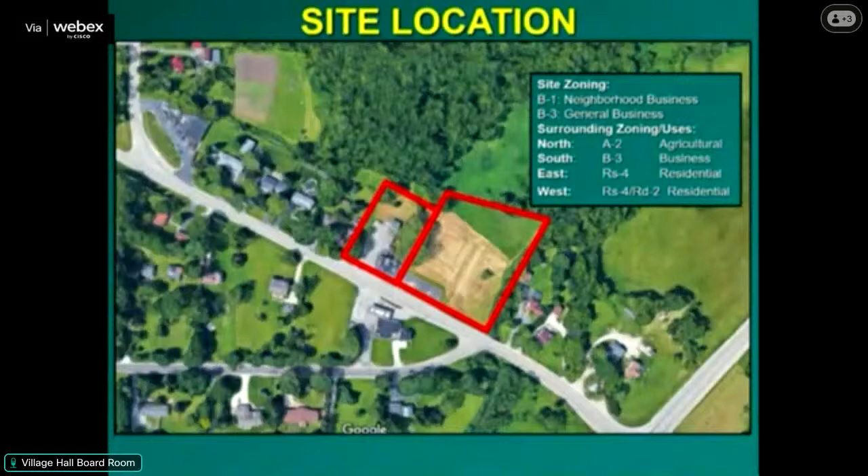Doctors LLC owns two parcels on screen, to the left, to the west. A 0.9 acre parcel zoned B1 neighborhood business contains an existing restaurant, bar, and parking area. A 2.1 acre parcel lies to the east, to the right on the screen. It's vacant, except for a small paved parking area adjacent to Appleton Avenue, and is zoned B3 general business. Back in 2019, Mr. Brooks obtained a conditional use permit from the village that allows him to use the adjoining paved parking area on the 2.1 acre parcel as part of his business operation.

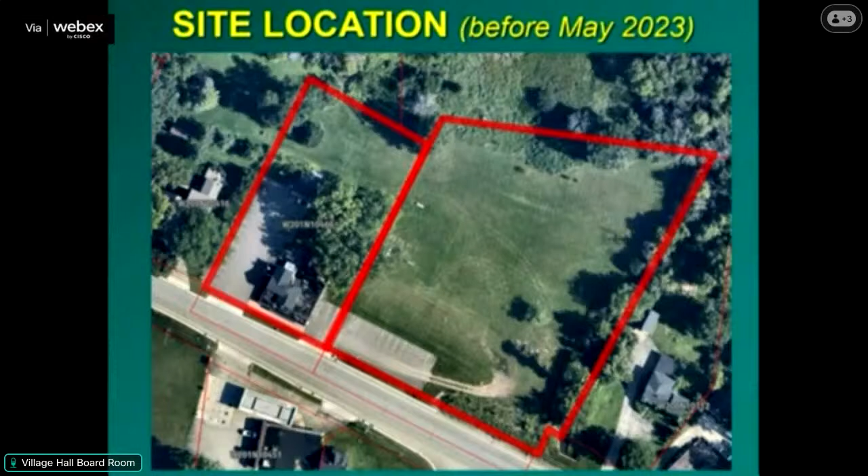Condition 1 effectively allows that use. Condition 3 in that conditional use permit requires any expansion of the parking lot to obtain an amendment to the conditional use permit and site plan approval from the Plan Commission. The image on the screen is of the sites prior to May of 2023. We know that sometime in May of 2023, the operator brought some gravel onto the site without obtaining the proper permits and approval under the conditional use permit.

So a code violation notice was issued, and the operator and the owner were given a couple of options: to remove the gravel, restore the site, and prohibit parking beyond the 4,800 square feet of paved parking permitted under the conditional use permit, or apply for a conditional use permit amendment with the intention of trying to get the board to approve an expansion of the off-site parking area under that conditional use permit.

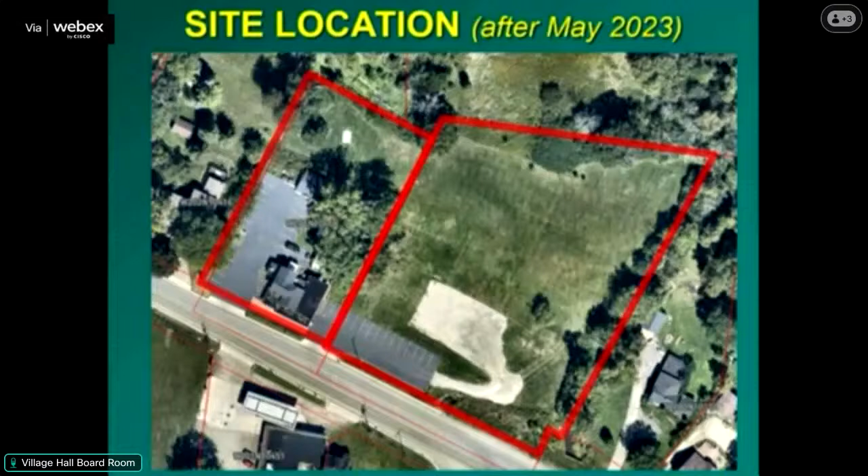In October of 2023, Plan Commission first reviewed a conditional use permit amendment request by Mr. Brooks. His request was to allow the continued use of the 4,800 square foot off-site paved parking area, which is highlighted in black on the screen.

The request also sought to allow expansion of that off-site parking area by allowing the gravel already brought in to remain, estimated to be just over 7,000 square feet, highlighted in red, and to allow an additional gravel parking area of approximately 2,500 square feet, shown in blue.

At the time, the Plan Commission discussed this proposal with Mr. Brooks and tabled action pending the submittal of code compliant and engineered site plans for whatever parking area was proposed for the off-site CUP amendment.

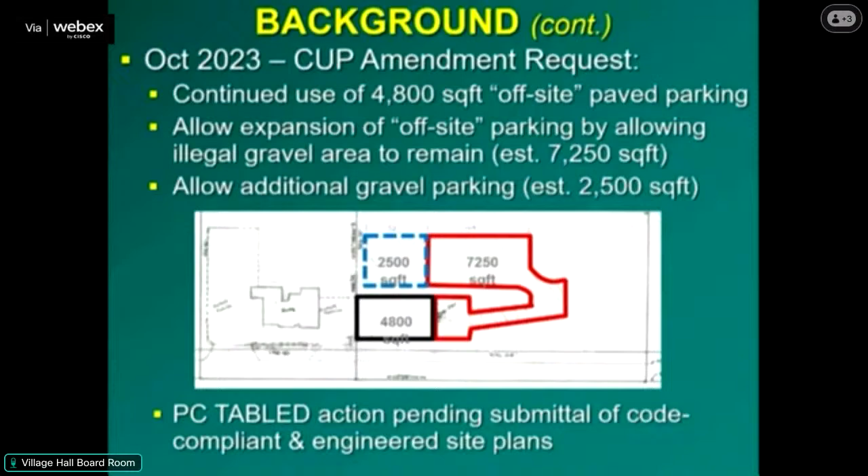In March of this year, in consideration of that CUP amendment, Mr. Brooks submitted engineered plans. He hired an engineer and a surveyor to prepare a site survey, existing conditions plans, and engineered site plans for the site, including 2 parking lot options.

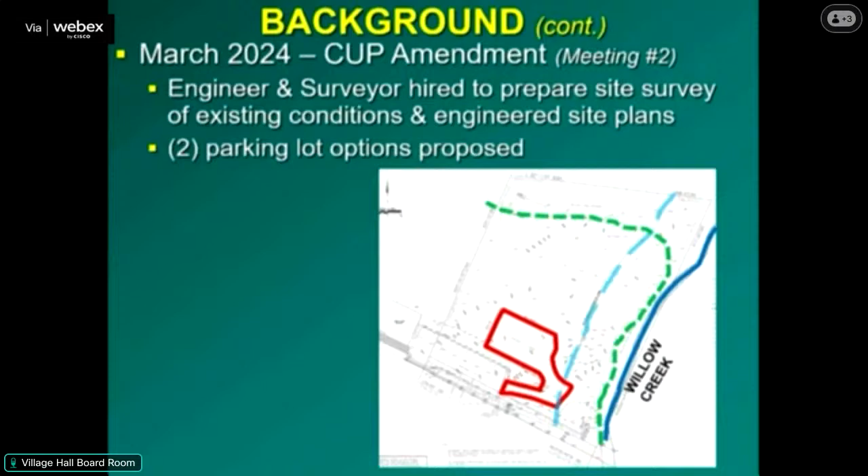Option 1 was to reduce the size of the gravel that had been deposited on the site, relocate it outside of a 75-foot navigable stream setback from Willow Creek and outside the 25-foot setback from the wetland area associated with Willow Creek, and reduce it to a size just under 5,000 square feet that would provide an additional 12 to 14 parking stalls, as highlighted in red on the screen.

Option 2 was to reconstruct the existing 4,800 square feet, which was a requirement of the CUP if the area was to be expanded, and redesign the parking area to meet zoning code setbacks and stormwater management requirements.

In the course of reviewing those alternatives, it was decided to keep whatever parking area was proposed under 5,000 square feet so as to not exceed stormwater management requirements that might trigger the need for either green infrastructure improvements on the site or more significant stormwater facilities on the property.

Option 2 was a code compliant paved parking area that unfortunately only provided 14 total stalls, no net increase from what had been previously provided by the original 4,800 square feet of pavement.

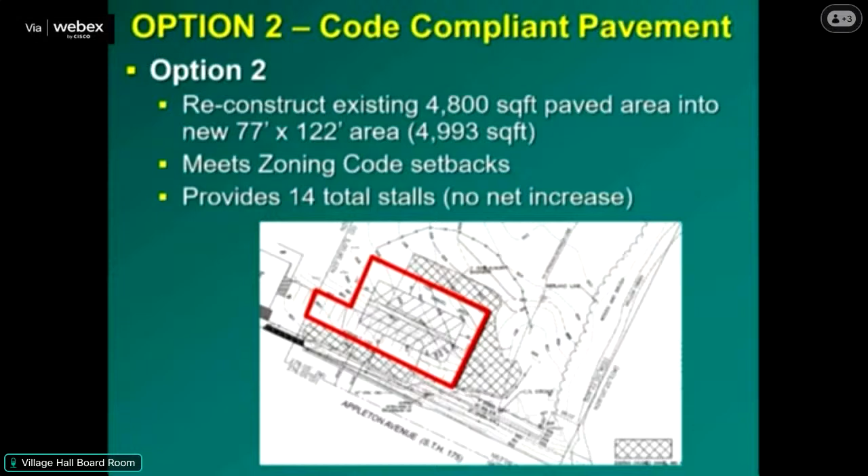So at the March meeting, the Plan Commission recommended an alternative, a combination, to approve the CUP amendment allowing off-site parking expansion, and to approve option 1 with 3 conditions: that the gravel area actually be paved to be compliant with the zoning code, and that a 10-foot wide buffer designed to filter stormwater runoff from both the existing and new parking areas be installed around the perimeter and along the connecting driveway between the 2 parking areas.

Also required was a barrier around the perimeter of the parking areas to prohibit parking beyond the 2 paved parking areas approved under the CUP. The village board approved the Plan Commission recommendation and amended the CUP soon thereafter.

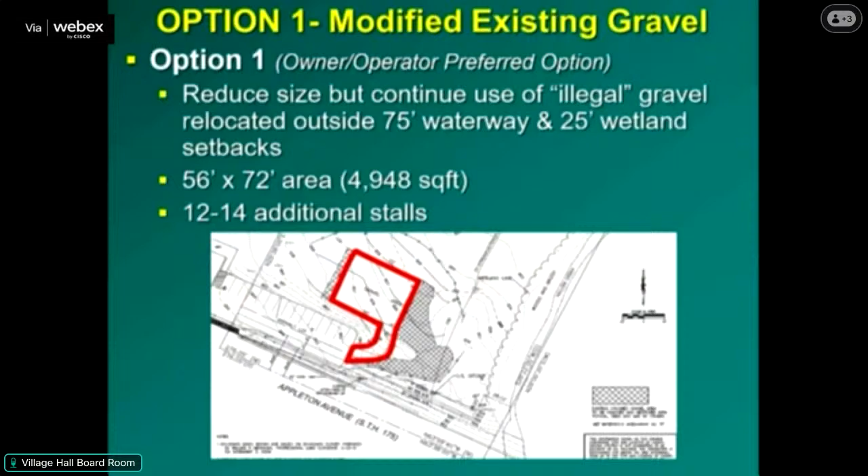The vegetated buffer is shown around the perimeter, and the barrier proposed is a post and rope barrier fence installed around the perimeter of the new parking area: 4x4 posts, 3 feet out of the ground, with a 1-inch diameter rope linking the posts. The proposal is for the posts to be spaced at 10 feet.

As you'll see in the staff recommendation, the recommendation is to reduce that spacing to 6 feet. But with that, the staff recommendation is to approve the site plan for the revised option one, subject to 4 conditions that we can go over as necessary.

Mark Brooks is here with his engineer and surveyor. If you have specific questions you want to ask—Mark, is there anything you want to add at this point? No. So with that, again, the staff recommendation is to approve the site plan with 4 conditions.

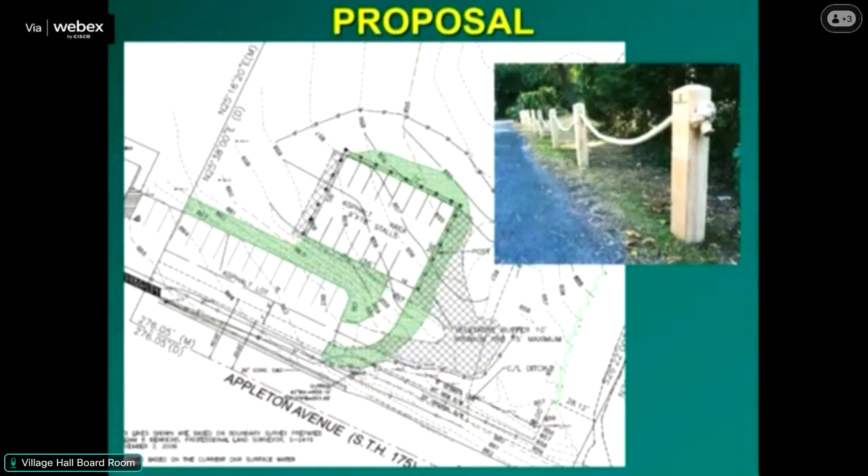All right, thank you. Commissioners, I will make a motion to approve as presented for discussion. Motion made. Do I have a second? Motion made and seconded. Discussion.

Trustee Baum: So at the last village board meeting, this project, the liquor license, is coming into question. Well, how are we handling all of this? Do we table this another week, another period, to get the village board stuff resolved? Or are we moving this forward, and can this move forward without interrupting the village board issues?

Well, they are 2 separate issues, albeit tied together with the Das Bellroom operation. I have not received a request from Mr. Brooks to table action, continue it, or even withdraw it in light of what the board is pursuing.

I guess it's up to the plan commission if they feel it's necessary to table this for some reason, but obviously if it's approved, it could be with an additional condition subject to the business remaining in operation and the parking being required, or some other wording you may see fit. So we need to address it if we want to.

What I've learned over the past few weeks is that while we've solved the problem of people parking out on the grass by putting this rope barrier around, we've just moved the problem somewhere else. People are now parking across the street and we don't have conditional use approval for that off-site parking, and they're parking in the grass over there now. So how are we going to resolve that?

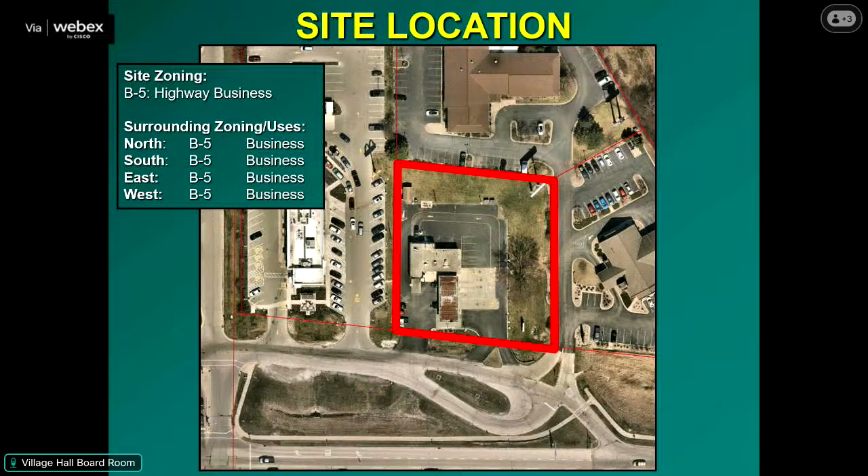Thank you, Mr. Chairman. The new Crew Car Wash will be located, as shown on the screen, on Emmer Drive, the short frontage road adjacent to County Line Road, just west of the US 41 interchange. Back in April of this year, site plan approval was granted for a new 4,500 square foot car wash facility. The site will be completely redeveloped and replace the existing BP gas convenience store and car wash operation on the 1 acre parcel.

At that time, action was tabled on the sign package, and that is presented here this evening for your consideration. Since that meeting, staff has worked with the Crew Car Wash representatives on signage. Some modifications have been made to some of the signs that were originally proposed, and staff believes the package that is presented now is code compliant and recommends approval for 21 total signs, including wall signage, the replacement of the pylon sign face, and mostly directional and instructional signage around the site.

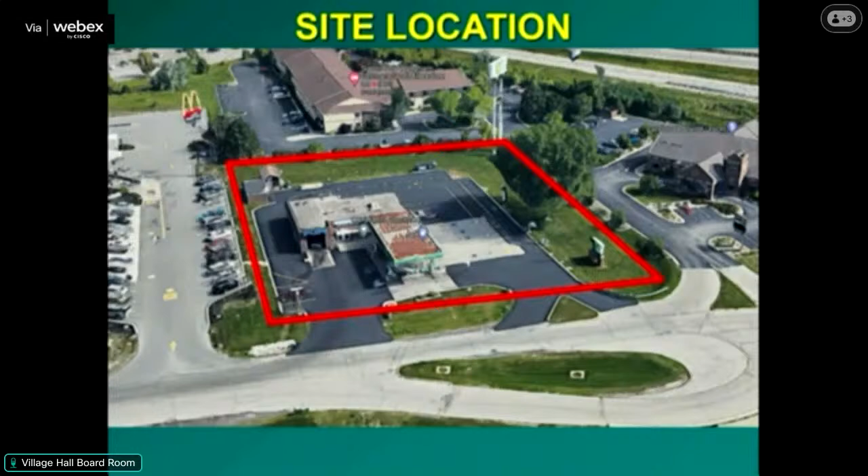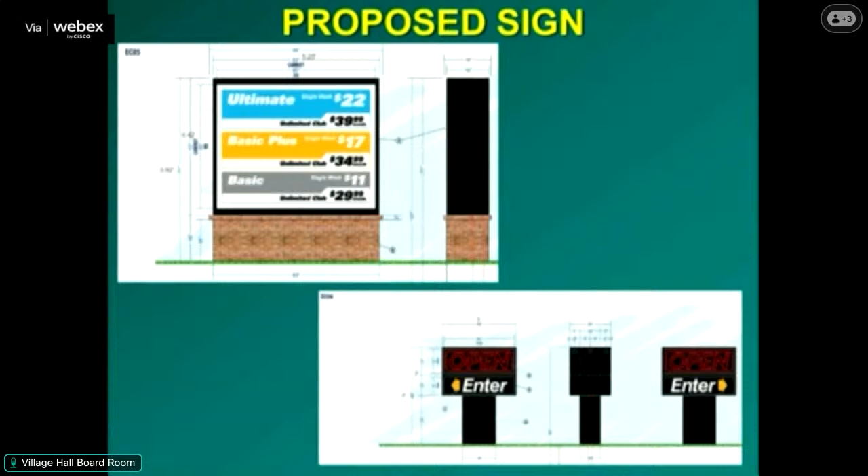I can quickly go through some of those signs. The monument sign will be refaced. The existing pylon sign will be refaced. Signage will be included on 2 of the elevations on the building itself. Additional instructional signage back into the site itself for those in the queue for the car wash, and additional directional signage, wall mounted and directional monument ground signs as well across the site.

The staff recommendation is to approve as proposed, subject to one condition that simply has to do with getting an electrical permit for any signage that requires electrical work.

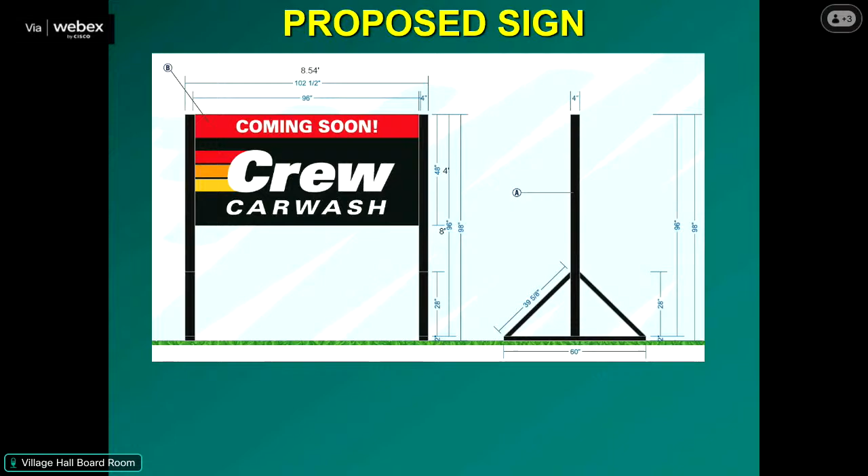Thank you. Okay, make a motion to approve the proposal as presented. Motion made and seconded. Any discussion on the motion to approve? No discussion. All those in favor, please say aye. Aye. Opposed? None opposed. Motion carries.

Next item under new business is item C, Innovative Signs, Inc., agent for TDC Willow Creek LLC, property owner located at North 102, West 19200, Willow Creek Way. That is on tonight's agenda for sign review for Diamond Vogel, for action.

Give us more information and background on this new business item. We'll turn the meeting over to the Associate Planner, Jordan Yankee. All right, thank you. So I don't have a sign package, just one wall sign for review. We'll go to the site here.

So the applicant on this is Diamond Vogel. Actually, it would be the tenant, the owner, I'll get to in a moment. But Innovative Signs is proposing a wall sign at the new industrial building located off of Willow Creek Way. I'll actually go back for a second. You'll see the address, and that building was approved about a year ago and was recently constructed.

As you'll see here, it was approved in 2023, a little bit over 200,000 square feet of industrial multi-tenant type building, part of the Willow Creek Business Park. As I mentioned, this application is Innovative Signs, agent for TDC Willow Creek, the property owner, requesting approval just for one wall sign for Diamond Vogel at the subject location.

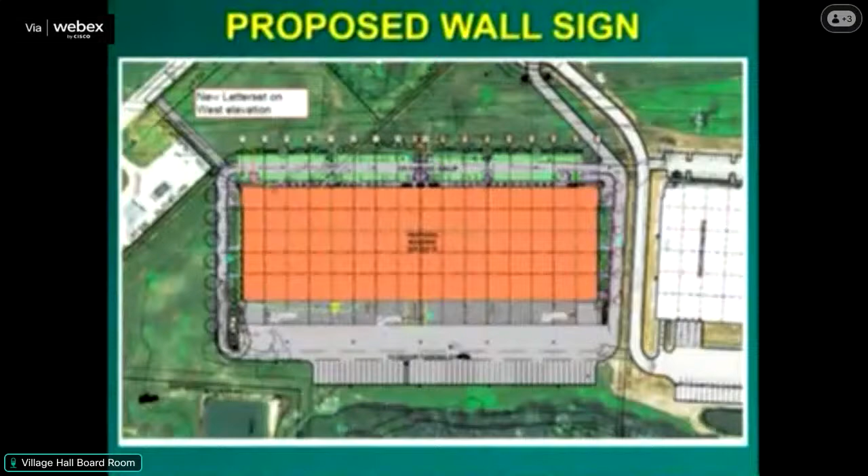And here is the layout of the new building. The location of the sign is a little hard to see with the colors, but in the image it's in the top left, which is actually the southwestern facing wall of the building. Again, it's roughly 81.5 square feet. It meets the square footage allotment in the code. It will be illuminated in accordance with the application from Innovative Signs, at the southwest corner of the building above the building entrance.

So with that, the recommendation of staff is to approve the wall sign for Diamond Vogel, subject to two conditions. One, as Jeff just mentioned, would be the same on this one, the requirement to obtain an electrical or building permit for review. And the other condition noted in the packet was to obtain written approval by the association for that industrial park. So with that, I can answer any questions. I do believe the applicant is in the crowd tonight as well.

I'll make a motion to approve the proposal with the two conditions. Motion made and seconded. Any discussion on the motion to approve? No discussion?

Did you have a question? Okay, do you want to come to the podium and state your name, and you are, sir? I believe the electrical permit for the sign was covered under the original developer's electrician's permit. Okay, thank you for that.

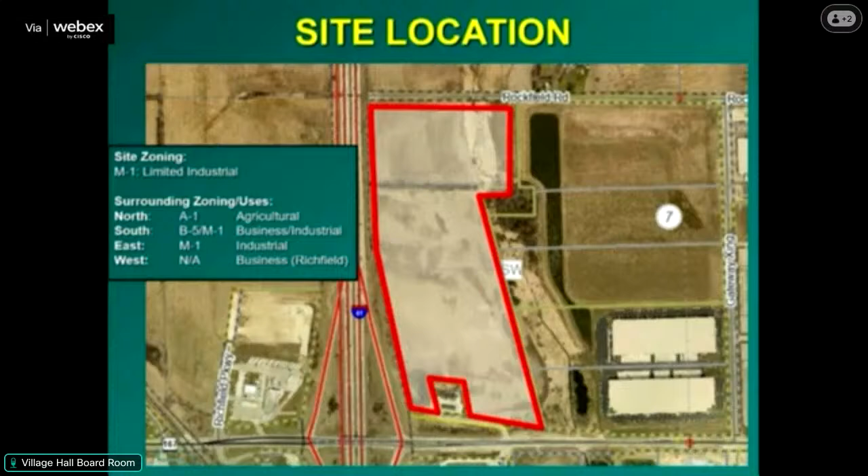And this site is located in the Holy Hill Gateway District. Here you can see the site location. It was rezoned to M1 Limited Industrial, and you'll see some of the surrounding area there. In short, the certified survey map would create one total parcel, depicted in the site location map, here showing the existing site with that gas station just to the south nestled in.

As I mentioned, this is in the Holy Hill Gateway District, which calls out industrial as desirable land use in our 2050 plan. Some brief background: the land use plan change and a rezone was approved for the site as recent as 2023. The land use plan was changed to light industrial warehousing, and the zoning was changed to M1 to support the new Green Bay Packaging facility.

Site development plan and the conditional use permit was approved earlier this year, actually just as recent as April, I believe. And in totality, it's roughly 270,000 square foot warehousing facility with a small office.

Just to reiterate, the result of the CSM will be a 1-lot, 51.895 acre lot to house that manufacturing facility. Here's the CSM, hard to see, but again that lot mimics what was on the previous slide.

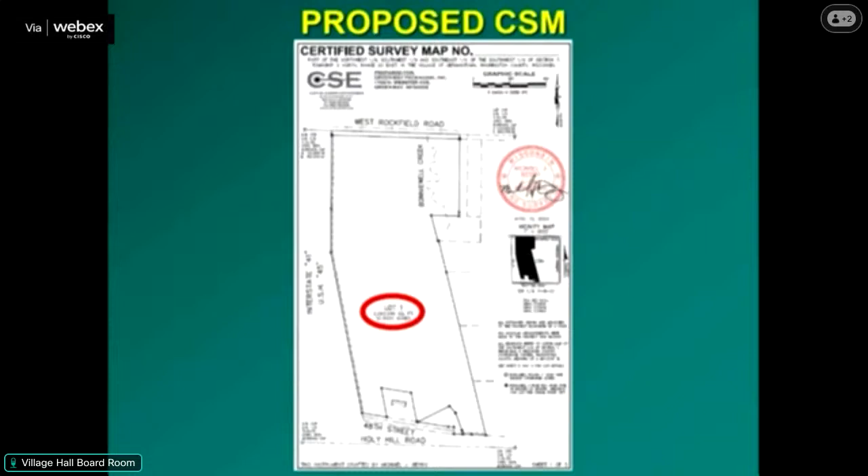One thing to note, there is a little bit of a jog in the lot line on the southern portion. I believe that was through dedication of public right-of-way with the Holy Hill reconstruction, so you'll see a little triangle portion of property that will actually be dedicated right-of-way, if I'm not mistaken. With that, here zoomed in a little bit, you can see the new road entrance design for the facility.

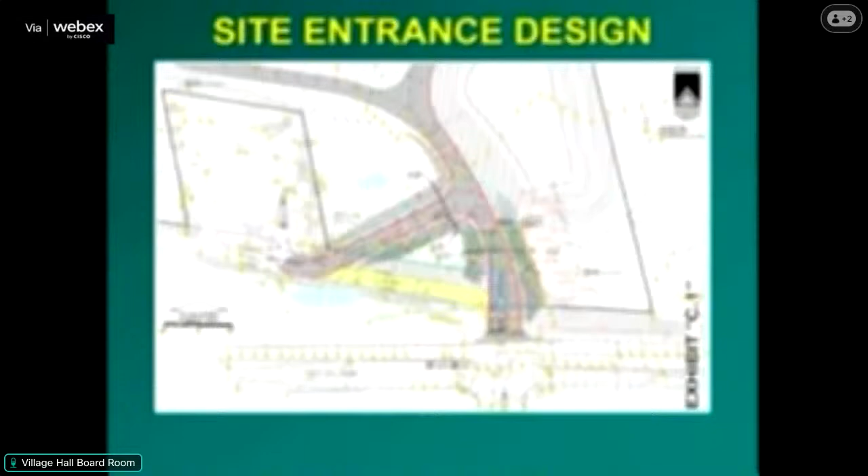A couple comments here. We actually had 2 village surveyor memos on this. I believe we had a change in surveyor at the time, but to include everything, we wanted to reference the minor technical corrections in each of those memos and make it a condition of approval. So the staff recommendation is to approve the one lot certified survey map at this location, subject to the two conditions, which reference the minor technical corrections prior to recording of the map. And that is all I have on that one.

Okay commissioners, make a motion to approve the certified survey map with the two conditions as presented. Second. Motion made and seconded. Any discussion on the motion to approve? No discussion. All those in favor, please say aye. Aye. Opposed? None opposed. Motion carries.

Next item under new business is new business item E, Bryan Building Corp, agent for Goldendale Road 4 LLC, property owner located at North 206 West 12880 Gateway Court, certified survey map for a property line adjustment to accommodate expansion of the Golden Pet Manufacturing Facility. On tonight's agenda for action, give us more information, background on this new business item. We'll turn the meeting over again to Mr. Yankee, our associate planner.

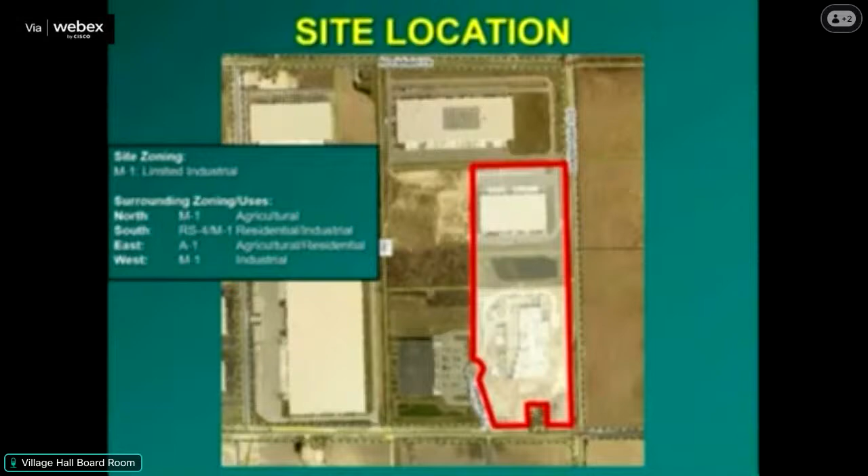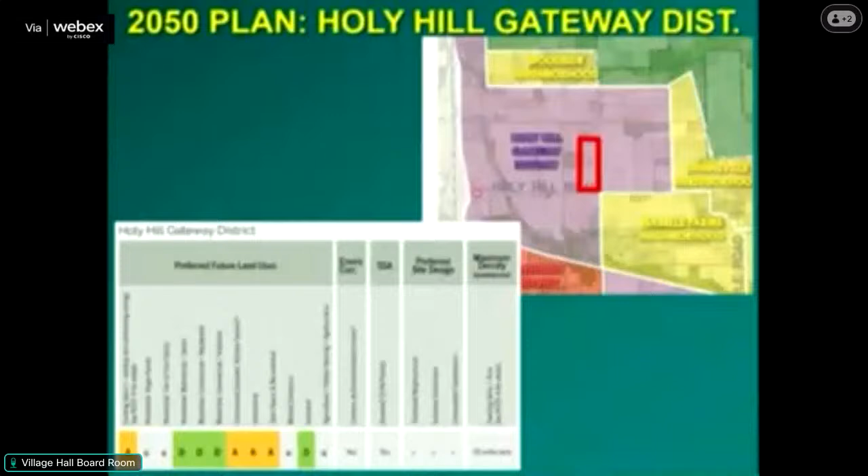So here you can see the site location, subject property where Golden Pet Manufacturing Facility is in the southern portion of the red boxed area. The site is zoned M1. You can see some of the surrounding area with newer development as well that has happened over recent years. A little bit more zoomed in portion of the existing site. Same as the last one, this is in the Holy Hill Gateway District, which calls out industrial uses as desirable in our 2050 plan.

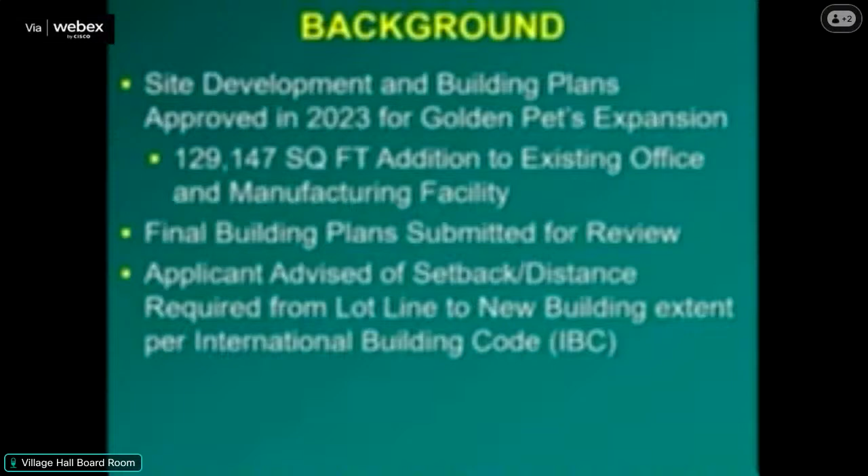Some background on this: the site development and building plans were approved in 2023 for Golden Pet's expansion, about a 130,000 square foot addition to the existing facility, which would be to the north of the building. Final architectural building plans were submitted for review, and there was a building code compliance item that required a bit more separation from the new facility's expansion to where the northern lot line would exist prior to this proposal. Moving the property line 10 feet north under this CSM would accommodate that expansion without any issues under the International Building Code for setbacks for the building.

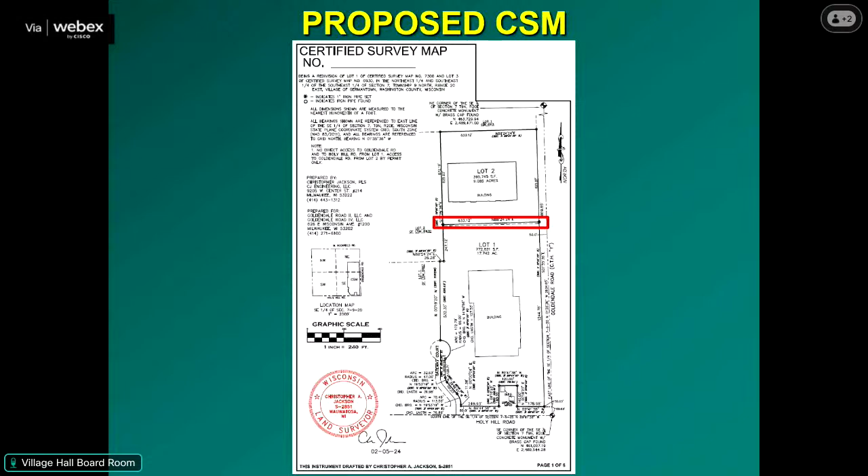Again, same as the last one, we didn't have 2 memos on this one, but the village surveyor had some minor technical corrections for the certified survey map. So staff is recommending approval of the CSM for Golden Pet Manufacturing in reference to the 1 condition of approval for accommodating those minor technical corrections prior to recordation of the CSM.

That's all I have. Make a motion to approve the 2-lot certified survey map with the 1 technical correction as presented. Motion made and seconded. Any discussion on the motion to approve? No discussion. All those in favor, please say aye. Aye. Opposed? None opposed, motion carries.

Next item under new business is item F, Keller Inc., agent for Orange Blossom LLC, property owner of David J. Frank Landscaping located at North 120 West 21350 Freistadt Road. Site plan review applications for a 5,250 square foot corporate office building addition and a 1,552 square foot landscape maintenance division office building, and a sign permit application for a wall and monument signs. That's on tonight's agenda for action. And to give us more information background on this new business item, we'll turn the meeting over to Director Retzela. Thank you, Mr. Chairman.

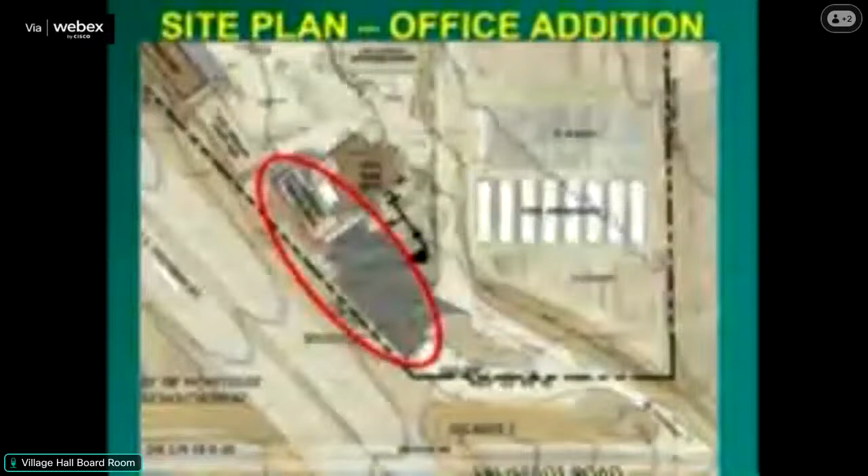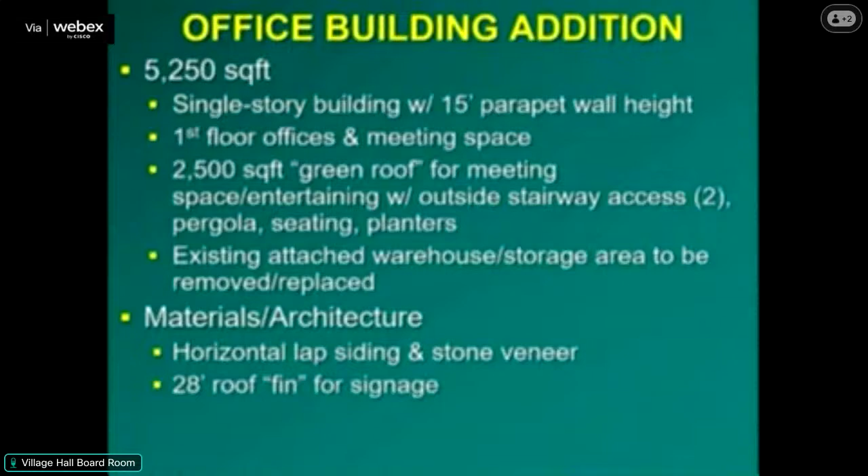This portion of the site plan shows the office addition, referred to in the staff report as the corporate office addition. It's 5,250 square feet, a single-story building with a 15-foot high parapet wall height, with first floor offices and meeting space.

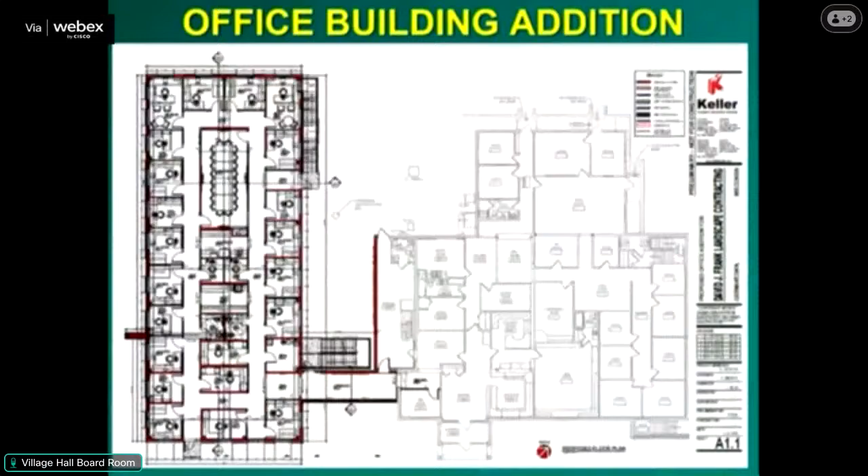There is a 2,500 square foot green roof proposed here, and you can see it here. That would be for meeting spaces and entertaining outside, with outside stairway access, pergola, seating, planters, and other features as shown in the detailed plans.

There is an existing attached warehouse storage area that will be removed and replaced with this new office addition. The materials and architecture include horizontal lap siding and stone veneer. There's also a 28-foot high roof fin for signage, as I'll show you shortly when we discuss the signage proposal.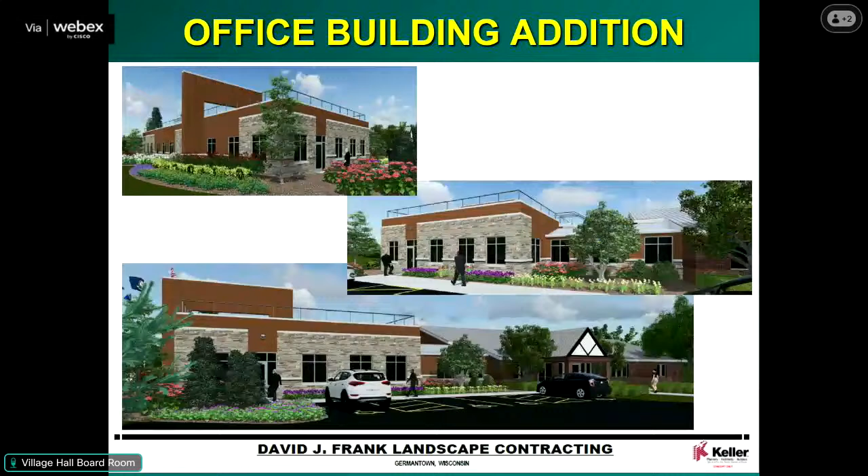A couple more of the office building addition renderings—you can see the roof fin with the signage that's proposed.

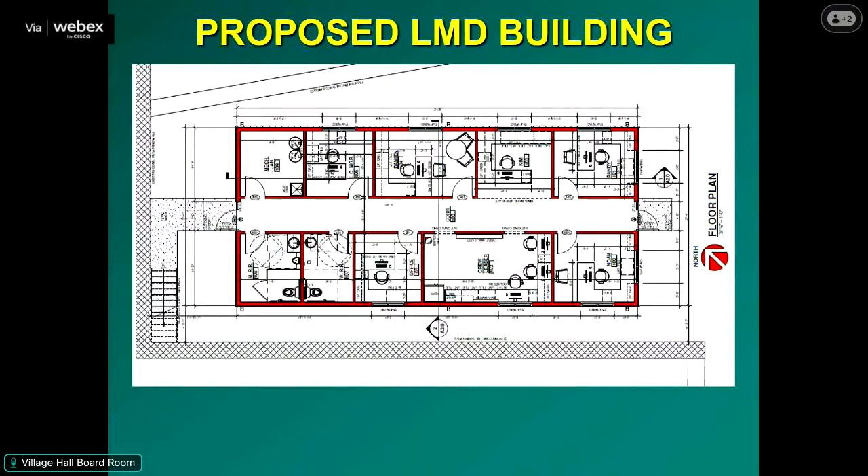This portion of the site plan shows where the proposed landscape maintenance division office building is proposed. Again, 1,550 square feet, a single story, simple office building with meeting space. It's going to replace an existing temporary office trailer that's on the site. Materials include horizontal lap siding and asphalt roofing for this particular building.

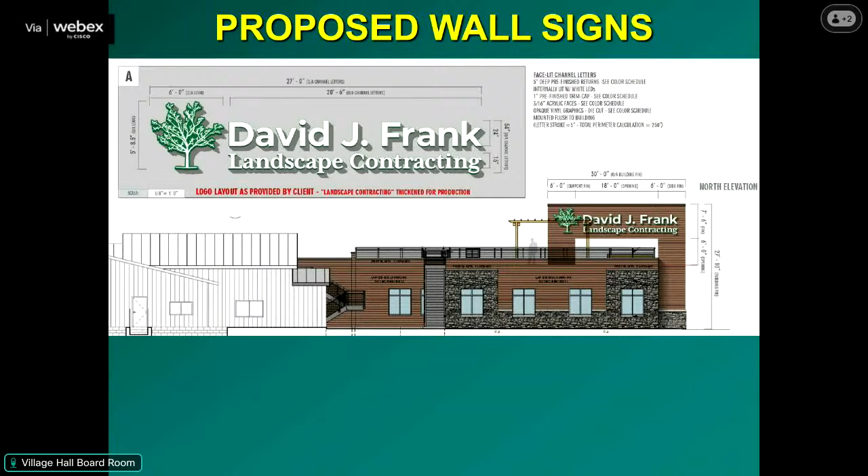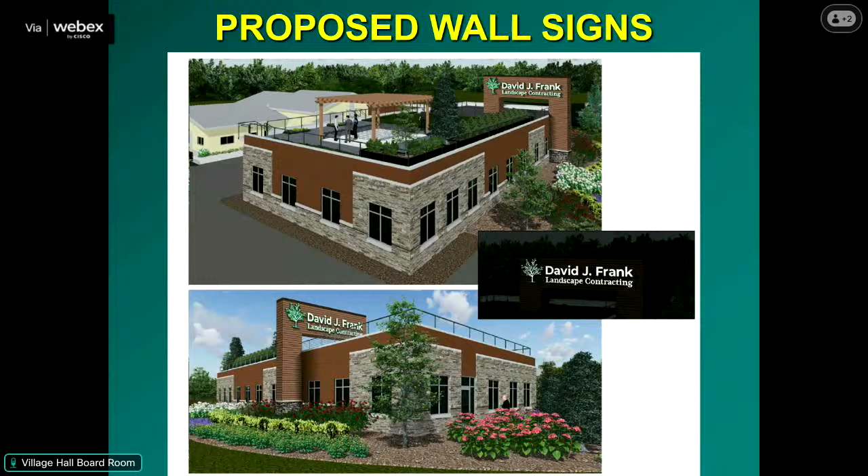Signage includes updated wall signage, as shown here. The roof fin on the office addition will have a double-sided sign, as shown, visible from the highway. The day-night view is shown here on the renderings, and also a new proposed monument sign for the primary entrance off of Freistadt Road.

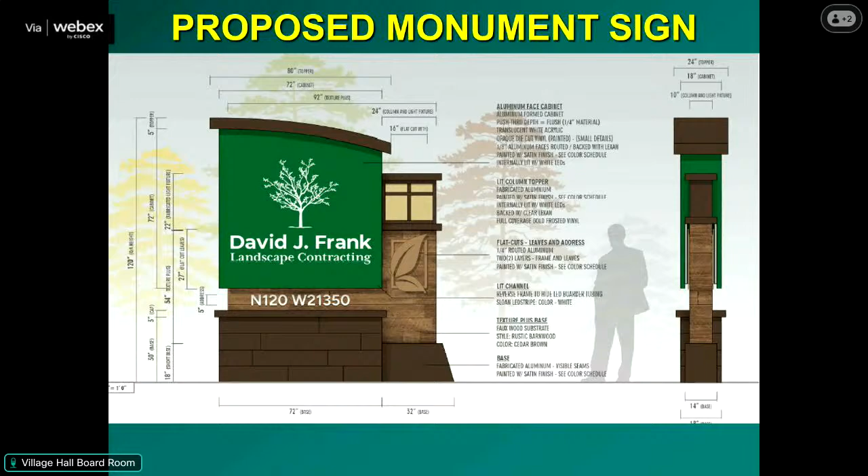In terms of staff commentary, there are a few issues. The existing parking lot and proposed sign location both encroach into US 41 right-of-way, and WisDOT permission is required. Typically they issue what's known as a revocable occupancy agreement that allows encroachments they can require to be removed as necessary. In fact, DJ Frank—I'm going to skip back to the first graphics.

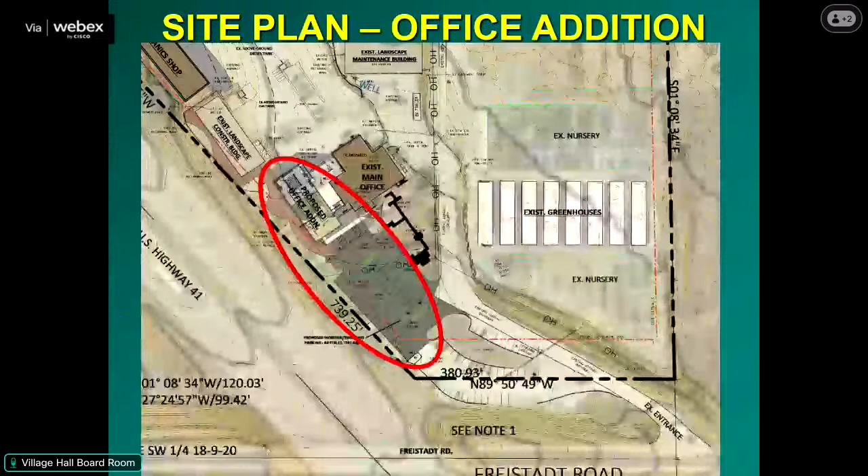DJ Frank had at one point a revocable occupancy agreement for a monument sign at their entryway that was invalidated by the DOT prior to the DOT coming through and making the improvements they recently finished to the bridge work and the roadway on either side. Now that work is done, I believe DOT will be reissuing a revocable occupancy agreement, but that hasn't been resolved at this point in time. So one of the conditions of approval is that the signage not be installed until that agreement is in place.

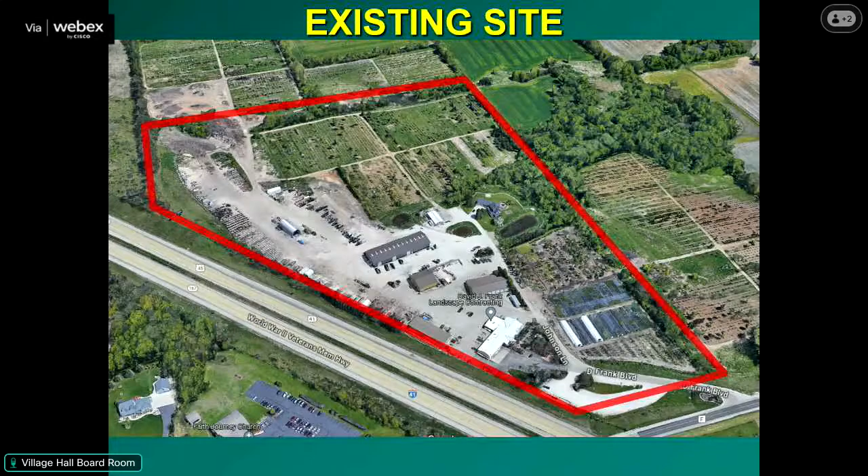Another issue: the property and overall operation is served by on-site wells and a private sanitary system, holding tanks in this case. We are simply looking for verification from Washington County that the existing system capacity, which may be required for the minimal additional loading, is satisfactory and no other improvements are required to their system. And finally, we're also waiting for verification from the village engineer that the existing on-site stormwater management facilities—there's a series of three ponds—I'm going to skip ahead here to the site plan.

Finally, the village forester had a couple of comments about additional parking lot landscaping being required per code, which is one of the conditions of approval. The staff recommendation on the site plan applications for the office building addition and the new LMD office building is to approve, subject to 6 conditions. The staff recommendation regarding the sign application is to approve the proposed wall, building entrance, and monument signs, subject to 3 conditions.

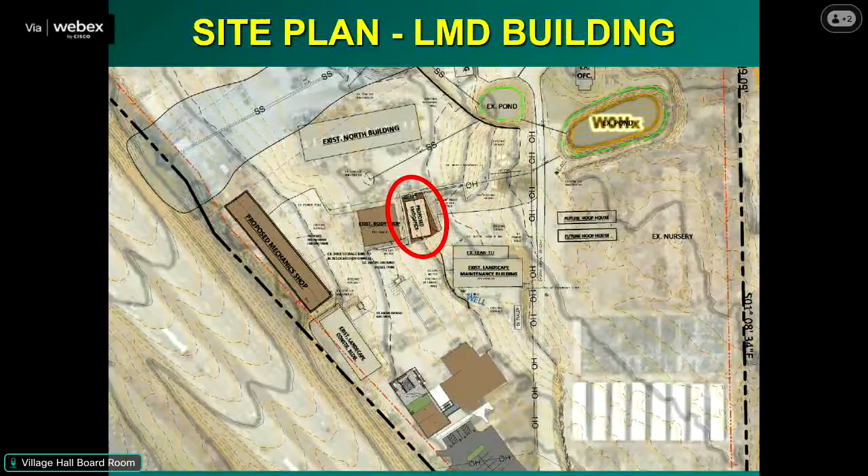Just 2 things to note. There was a condition on the signage for the base, on the base of the monument sign by the road. We did adjust that, so we'll send that in with stone as you requested. The other thing would be to address the verification from Washington County Land Use for the holding tank. We did some due diligence in the last couple of days. It's a 4,000 gallon tank, and with the additional new employees and current employees in the existing and new office, the requirement is about 3,900 gallons. So we're just underneath what's required with the existing tank. Just wanted to clean those 2 items up for you.

Okay, thank you. Thank you.

Commissioners, make a motion to approve the site development and building plans as presented with the 6 conditions. You're just going for 2 and not at this time the sign permit? I will do the sign permit separately. Okay, motion made and seconded. Any discussion on the motion to approve?

Trustee Ball: Director Retzloff, we are not approving floor plans of the building? Correct. I'm merely questioning because I'm not sure how we're putting a second story addition on without elevator access to it. No, we're not approving the floor plan. Obviously that would be a code requirement. I don't know, is there somebody who can address that here? I don't think we have to here. I just want to make it noted that we are not approving the floor plan at this time. That's correct. Okay, that's all I had.

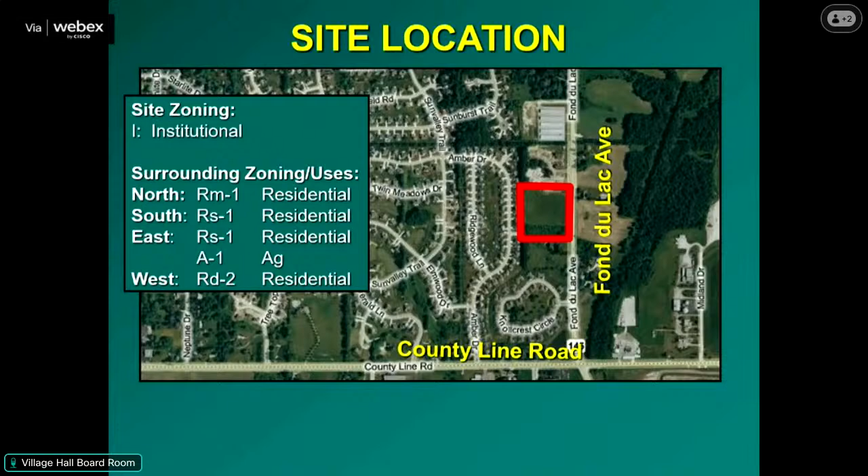As you indicated, this is for a property owned by Christian Life, Inc. It's located on Fond du Lac Avenue, just north of County Line Road, highlighted in red. There's a graphic showing the location closer up: to the west, Autumn Ridge Single Family Subdivision; to the north, Seven Pines Condominiums; to the south, a single family residence on a 5-acre parcel; and east of Fond du Lac Avenue, some large lot residential hobby farm properties.

The Christian Life Center, a little background: the property owner of an almost 7-acre parcel on Fond du Lac Avenue. It does include some right-of-way. I'm going to get to a graphic here. The current zoning is institutional.

At the time, in the year 2000, Christian Life proposed a development that included a church and a school, and at the time was required to dedicate right-of-way for the extension of Crimson Road from the west to the east, to connect the Autumn Ridge subdivision to Fond du Lac Avenue. Crimson Road is constructed through a segment of the Autumn Ridge subdivision. It abuts the southwest corner of this particular property. You can see it just off the screen there.

The property owner proposed development and had a development agreement with the village to construct the road. But the project never came to fruition, and ultimately in 2008 the development agreement was canceled. The project was withdrawn, and the property has obviously sat vacant since that time.

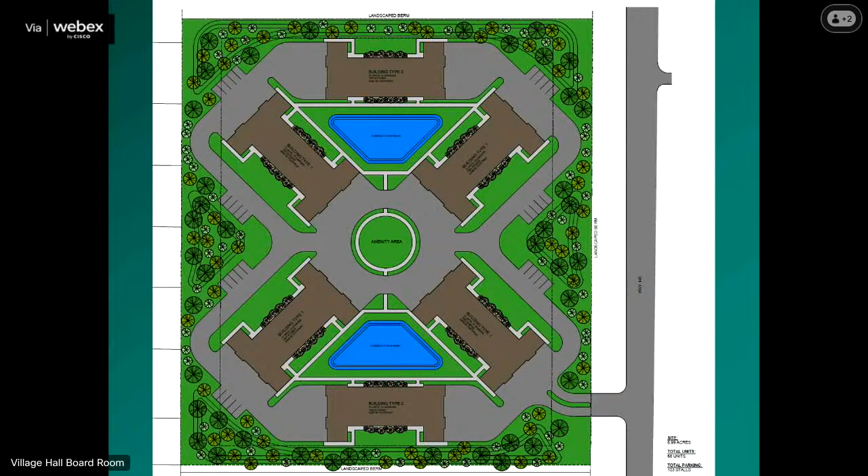I had a question, or maybe an expression of a concern. Along the west property line, adjacent to the single-family subdivision, you've got those two points with the two buildings where the corner of the building is close and the drive lane goes around it, real close to the edge of the property. I mean, clearly you can't put much landscaping in a narrow spot like that. Is there a way you could reorient those buildings a little bit and allow the drive lanes to be further into the interior, allowing for greater buffering and landscaping along the west property line?

You can try. We worked hard to try to get that. Maybe we can work on shrinking the orientation of the buildings, or orientate them differently. We've already got engineering on that.

Have you had the fire department look at this? Yes, John Delane was one of the advocates for requiring the extension of Crimson Road and not vacating it. He also commented that the driveway, the turn-in, and the radii around the corners of the buildings look a little tight. So he thought that leading up to site plan review, they would be asking for more detail, turning movement templates for fire trucks around those corners.

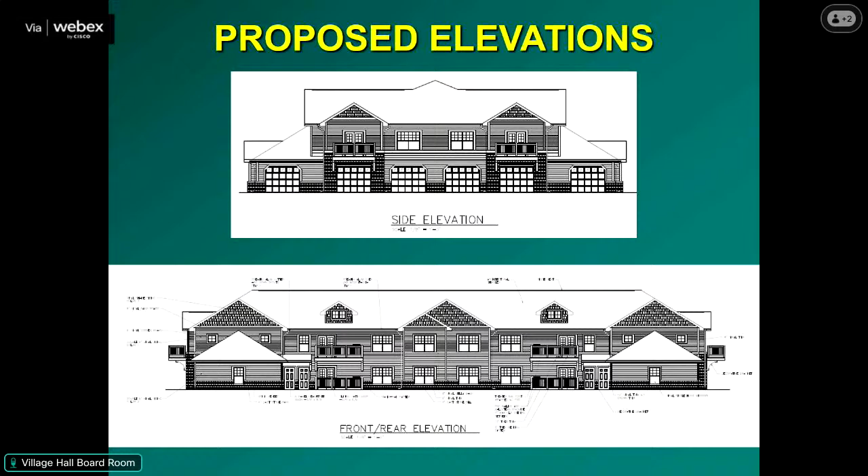Wouldn't you want some brick in the interior portion to bring out that gable roof? We could do that. More articulation - this seems like a lot of just lap siding. Sure.

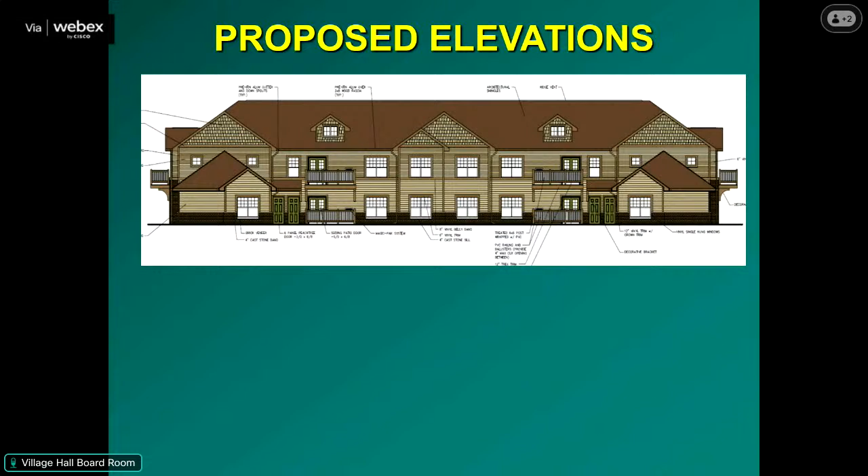If, where you have the gables, in this one, the center gable, if that can be projected a bit so that you get more articulation in the plan. And then that could be accentuated with additional stone as well. Sure.

Can I see a picture that goes all the way to county line again?

Is there a sidewalk in front of Autumn Ridge? No sidewalk there? So we have a stretch of sidewalk that's from Seven Pines and nothing beyond that? Just kind of an island of sidewalk?

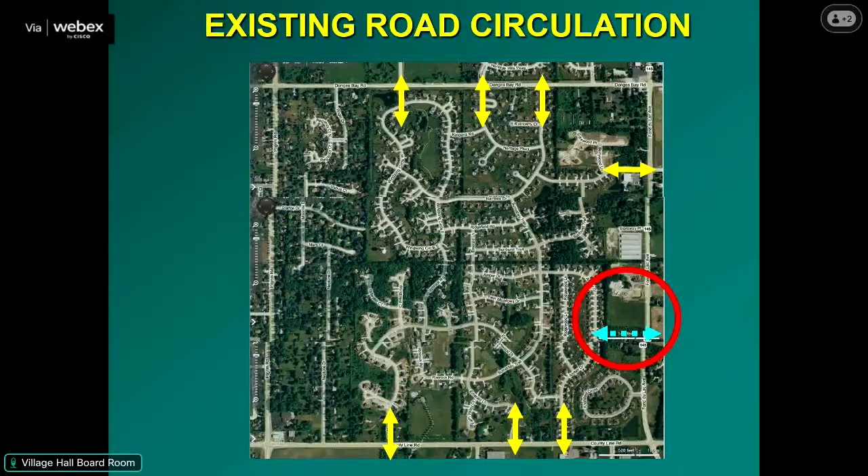Yes, one of the requirements of the Christian Life development was going to be the installation of sidewalk along Fond du Lac Avenue. And I believe that this section of Fond du Lac does appear on the sidewalk plan, path and sidewalk plan.

So the sidewalk would connect down to be a county line requirement eventually? To connect to the sidewalk that's down on county line? Yes, and to the north. Okay, so that would be a requirement of this development as well.

The proximity of where it is to other multifamily type buildings, I don't have a problem with. The only difference is you're putting this in the middle of condominiums.

There would be a zoning application for this, so it would go through public hearing? Yes, the current zoning is institutional, and to meet the proposed up to 10, over 8 to 10 units per acre would require the RM3 residential multifamily zoning district. Okay, Seven Pines is 8 units per acre? No, it's RM1, which is 6 units per acre.

In fact, a total of 36 dwelling units were approved in 9 buildings on 6.35 acres.

So I think you'll have representatives from both of those areas coming to the public hearing to view and give their comments. Yes, for sure. And I'm trying to recall, in addition to commenting about Crimson Road, the residents to the west in the single family homes were asking for as much buffering, landscaping, visual buffer as possible.